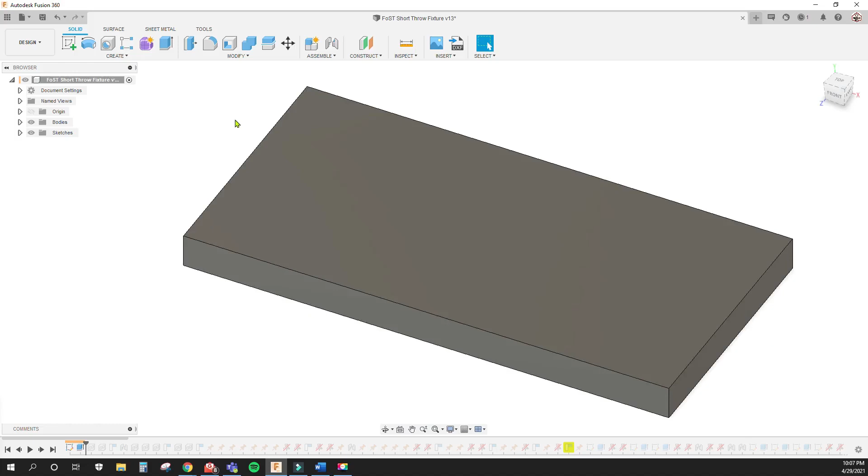To start off with, I created this plate. I bought this plate of raw aluminum, and it happened to just fit on the Tormach mill, which is what I had at the time, and it measured 14 by 7.

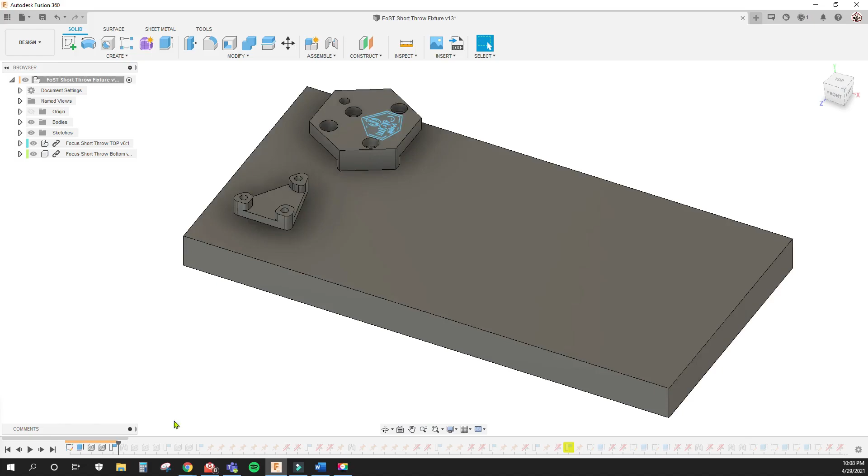After I designed that, I pulled in the upper and lower parts for the shift kit, plus a few bolts that go with it. These were already designed, so I moved them around, then copied them and moved those around until they all fit.

The plan was to do the top side of two sets, then flip them over and do the bottom side, milling out these little channels or pockets, if you want to call them that. So that's what I planned to do.

I brought in everything, got them situated, moved them around, and ended up grounding them. When you go right here, you can right click the component and hit ground - right now it says unground since it's already grounded. I moved them around until I got them to fit exactly where I wanted on the plate.

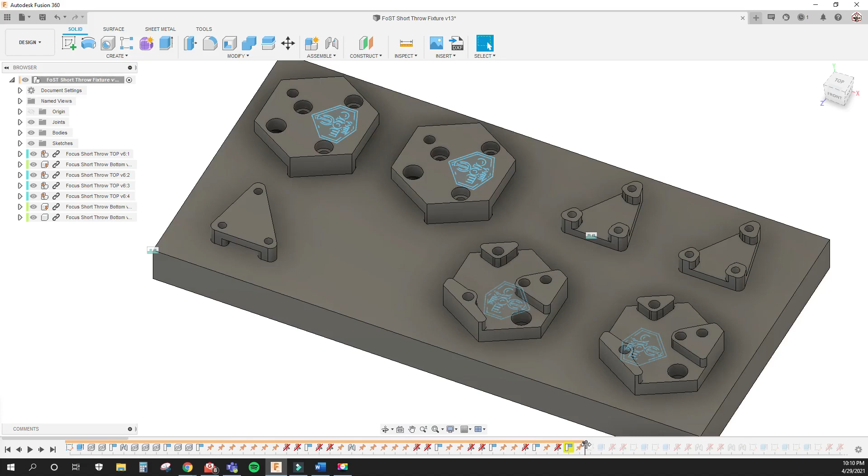After I got everything moved around exactly where I wanted it, there should be another one of these components right about here too, but I think that came later. Since I pulled this up from the archive, I don't really know what I was doing back in the day. After I got all these situated and grounded...

I created these pockets where the stock would fit into. On the left side here, I made these pockets where the raw stock will fit into, and you can see the component fits inside of these little rectangles that I made.

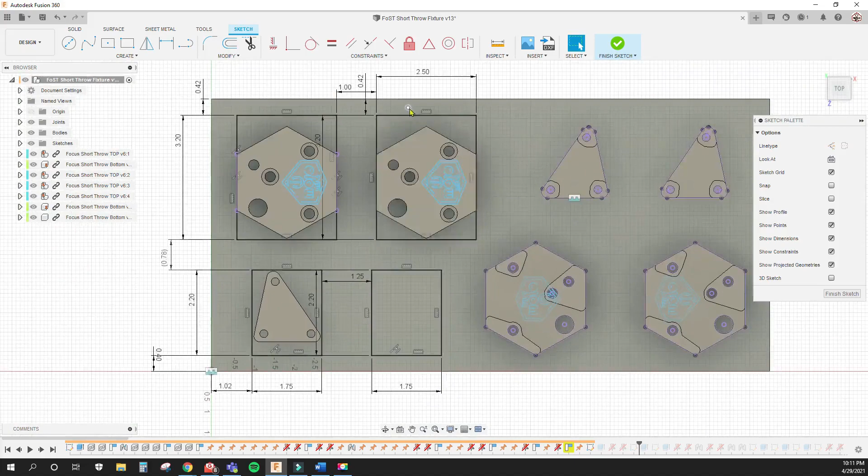On this side over here, I projected the outside silhouette of these components straight down to the plate. That allows me to use those features, the drawing entities from that projection, to make the pocket for when I flip these upside down to mill out this channel pocket.

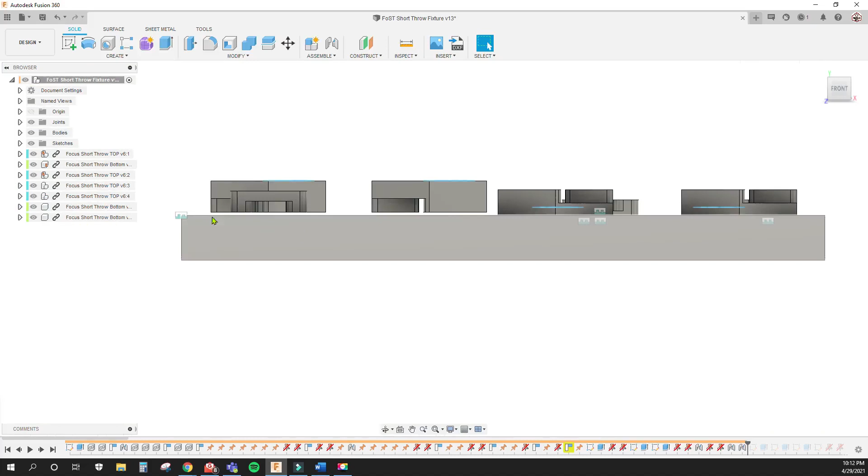One thing to note on the left side here, these are actually floating above the surface of this plate, and that's for a good reason - I want to machine this entire depth of the part on the first operation. So when I flip it over, all I have to do is machine the top at whatever's left down here, whatever I was holding onto with these pit bull clamps.

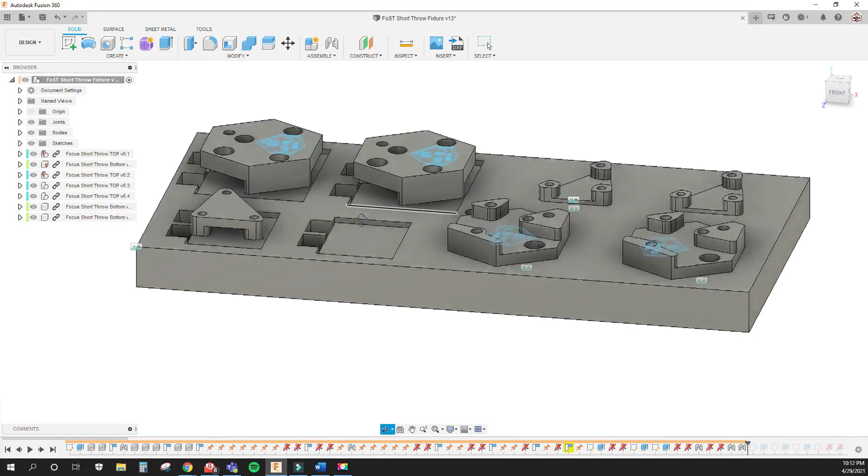Which leads me to my next thing, the pit bull clamps. I held the raw stock in with pit bull clamps from Mitee-Bite, these little clamps here, and they tell you exactly how to machine the pockets for your pit bull clamps. I believe I used this 26020 right here.

They give you this A dimension right here, so 0.2 inches away from the front side, and that's where you drill the center line of the hole. They give you the pocket dimensions - everything you need to know to design your fixture to be used with their clamps. It's very convenient that they have this. I really don't know any other way it would work if they didn't have this - I'd just be confused.

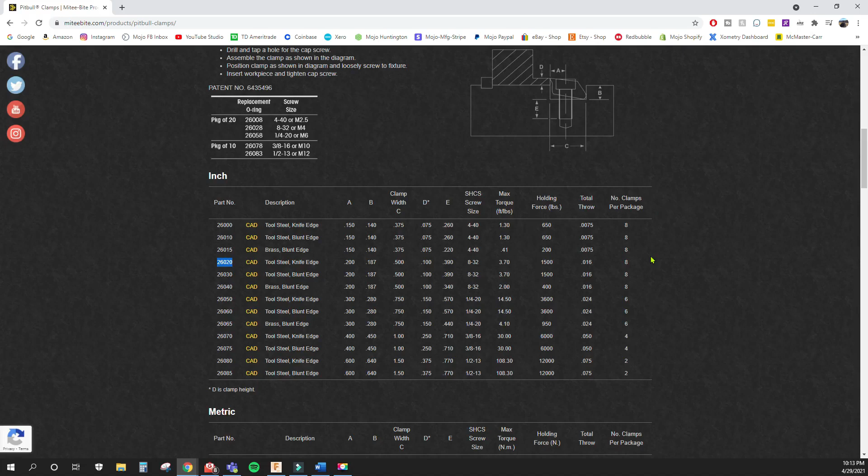So I designed these little pockets here for those pit bull clamps, and that would hold onto my stock for these parts. One thing to note, this depth was made to a specific depth to work with the depth for the pit bull clamps, so keep in mind whenever you're designing to get the depth of your pocket correct.

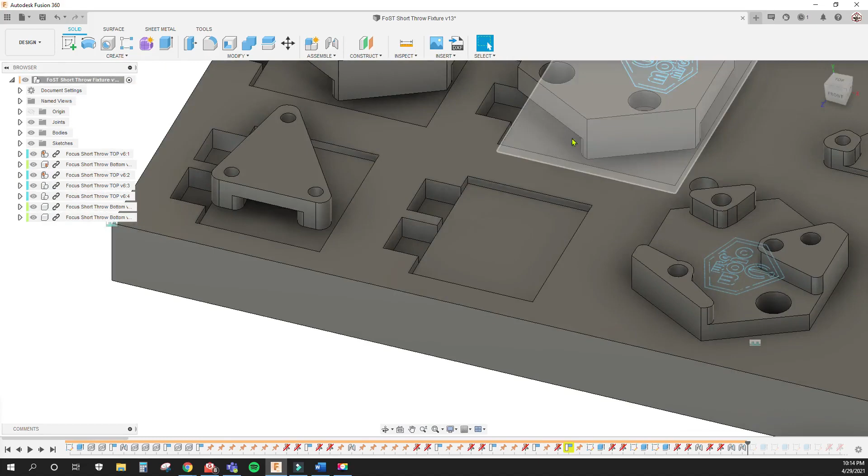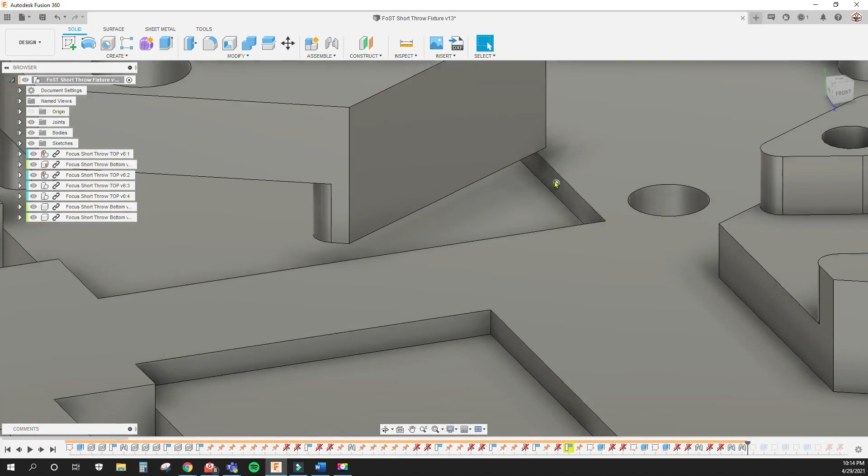Really, in some cases you don't even need to make these pockets here. I mean, you'd need the pit bull pockets, but you could just have another bar, say right here, to push the pit bull clamps against. Really I should have something like Talon grips to hold this side in rather than just the pocket of the aluminum, because this will get worn out if it's just aluminum. So you could have a steel piece there or whatever.

I did it this way because I didn't want to have to buy the extra clamps on this side. I'd rather just use the pit bull clamps and push against this side of the plate that I machined out of this pocket. So there, I go ahead and do pit bulls on this side too.

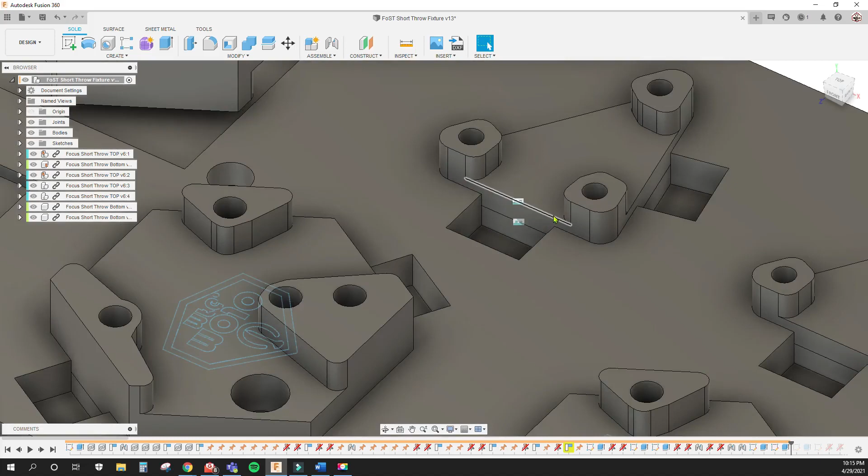This actually is the cosmetic side - this is the actual part. But it didn't really matter to me because this whole part is inside the engine. So I just wanted to be able to hold this thing down so I could machine it. The pit bull clamps make little indentations in the side of the part, which is okay for me.

These things still sold, so it didn't really matter to me at the time. Plus, I really didn't know any other way to do it at the time. Now I understand what I could have done, but still, these worked out really well.

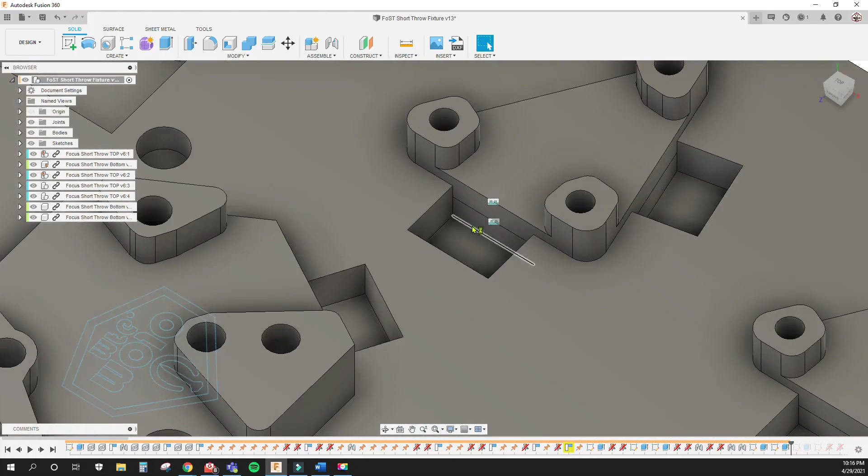So I made these pockets for the pit bull clamps on this side, and I did it for this bigger half too. I would just put those upside down in this pocket and tighten the pit bull clamps down, and I could machine it just fine. So now I added the holes for the screw for the bolt of the pit bull clamp, moving things around just a little bit more.

Now I'm adding in the stock. It was easier for me to model the stock piece that I was going to be cutting instead of just creating the stock from the setup in the manufacture tab. So I just modeled all the stock pieces.

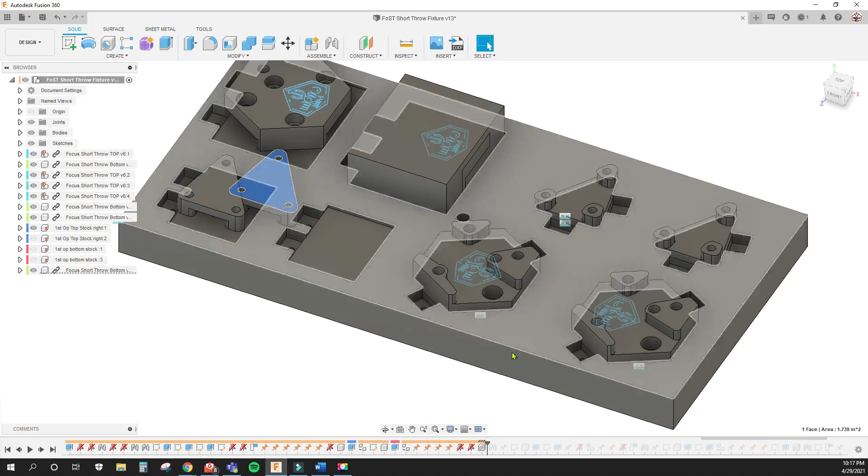Also, here's that one, I just haven't had it situated yet. There it goes. So I've added in all these stock pieces. I just modeled them up and made them their own separate component, and this is the actual stock that I will be machining these parts from.

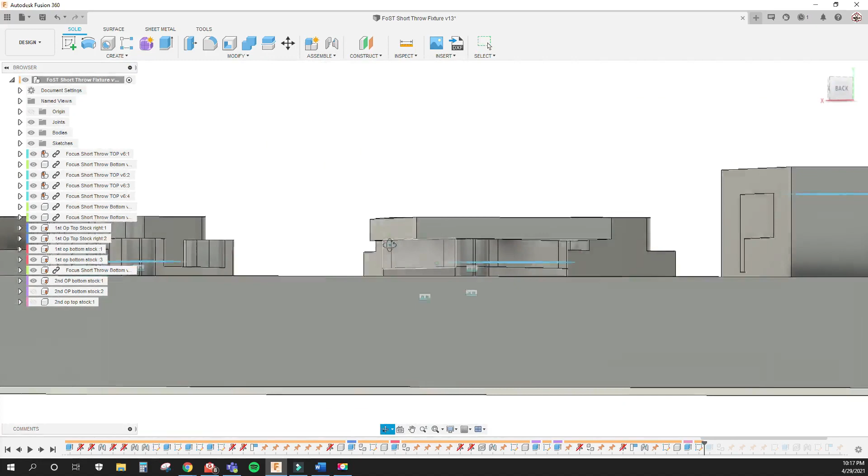Then I do the same thing here. So this is like what's left of the stock, what's going to be left when I machine it away. I select this piece of stock in my setup in order to machine this bottom half of this part, if that makes any sense at all.

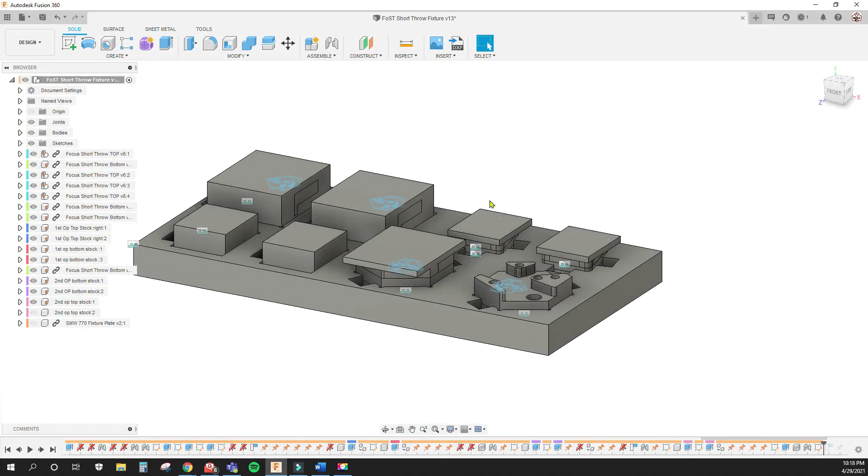Slightly confusing. So I added that one, and then there's this piece too, and that's what's left of that side after I machine this first operation. So like I said, these two sets over here are first operation, and these two sets right here are the second operation. And it looks like I added two more over here.

There was a good reason for that — I couldn't tighten down this bolt for this pit bull clamp because it was under this piece of the stock. So I had to add these two on the side here so I could tighten down this part so I could hold it to be machined. And there's that side too. So that's what I come up with.

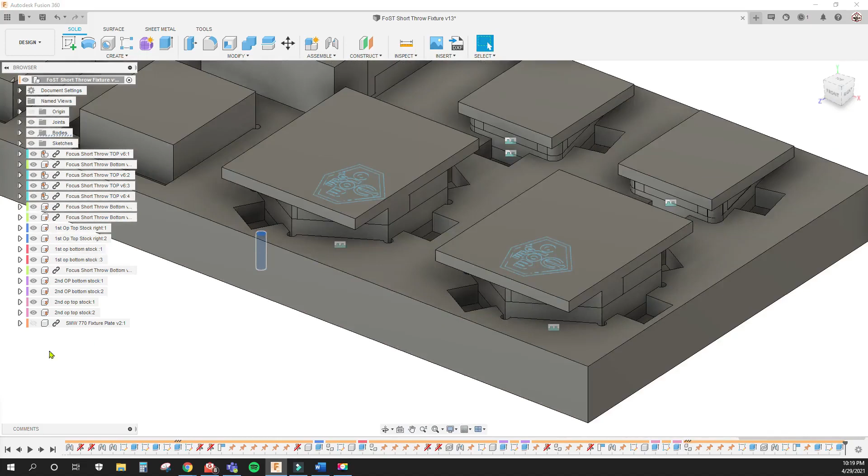That's sort of how I did it. Really the hardest part is getting all the parts in here and getting them situated where you want them so that they're away from everything else, so you can make sure they can be machined easily without running into each other. So here's the machining setup for doing one full plate.

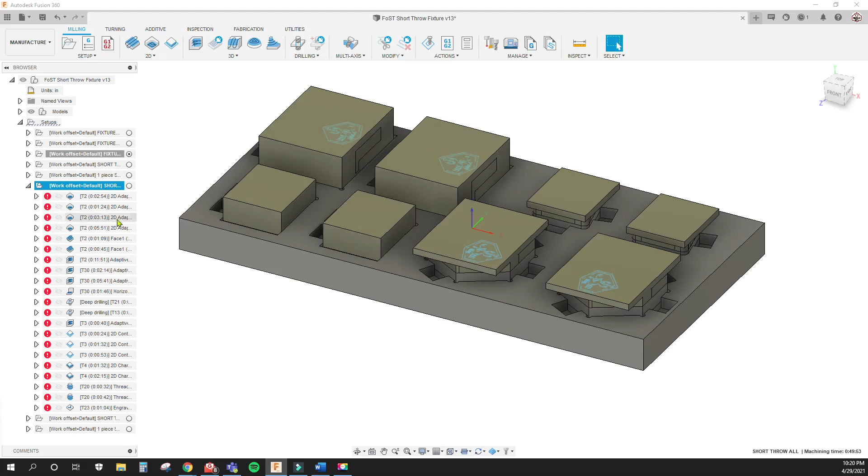You can see how these turn like a light tan brown color, and that just shows that that is the stock part, the stock to be removed. These are the 8 pieces to be machined, and my origin point is the bottom side of this.

So I modeled this in and then I machined it when I machined the fixture. I added this feature in here so I could find the center of this hole and the bottom side of that hole. That's the work coordinate system for this whole plate.

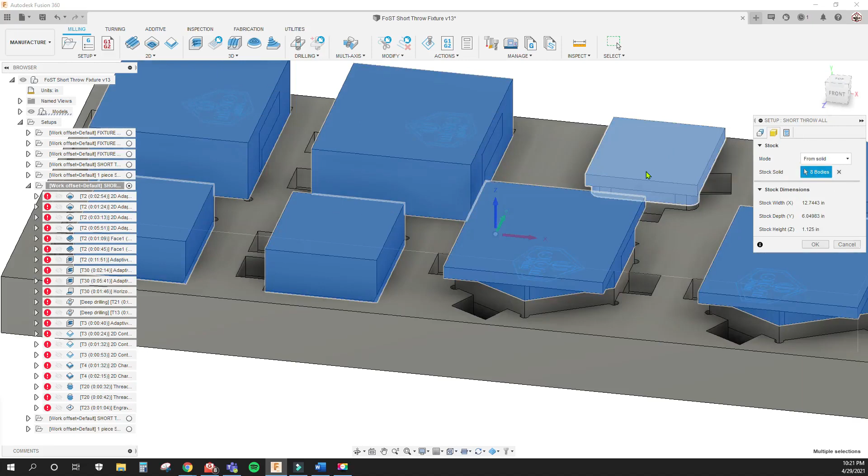And then I chose the stock sizes. I did it from solid, and I chose all these solid pieces for those specific parts to be machined. Then I can go in here and turn off all these stock pieces, and then I can go in and start adding different tool paths.

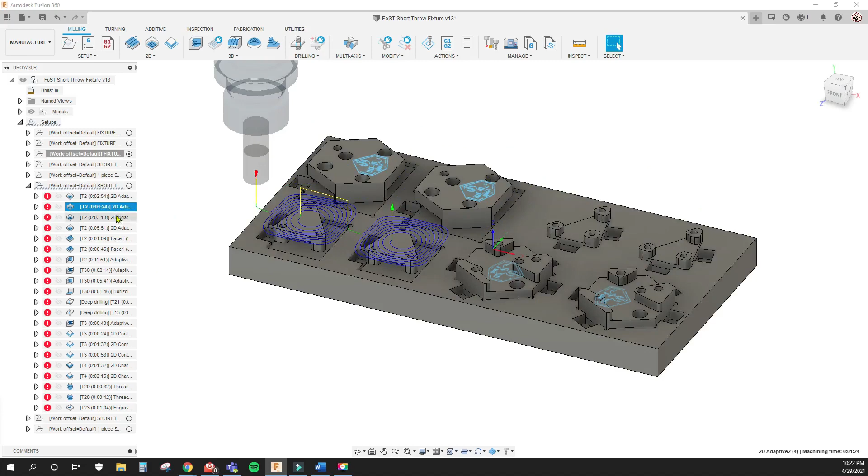So here we go here. Selected the top parts of those parts and hit OK. I'm not going to hit OK because it'll take forever to load. Same with those — just doing all the adaptive tool paths, and I believe this is the shear hog here, which is the 3/4 inch end mill. And then I start roughing everything out on the sides.

So really, once you get everything situated and get your stock pieces set up, this is a breeze. This is just as normal. If you're familiar with programming parts, this is just as normal. You just start clicking whatever you need to be machined for that specific part.

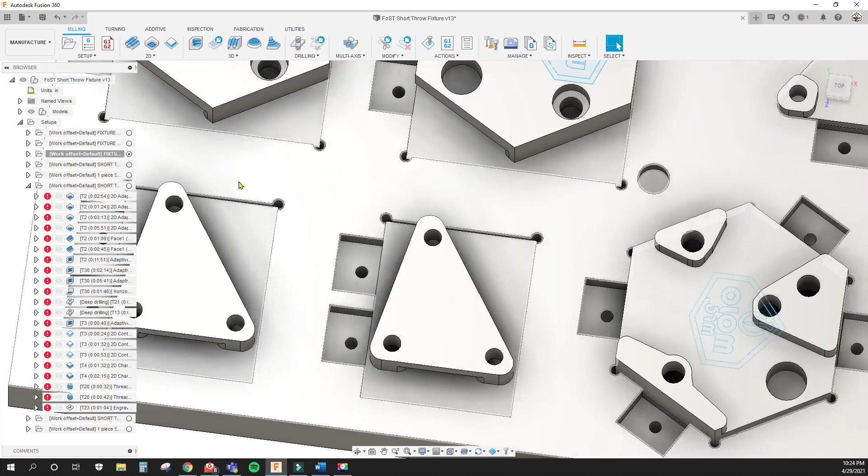So I really think that that is it for these pieces here. I always made sure that the stock was pushed up against these sides here, and that's how I knew how to locate the stock every single time. So I really think that's it.

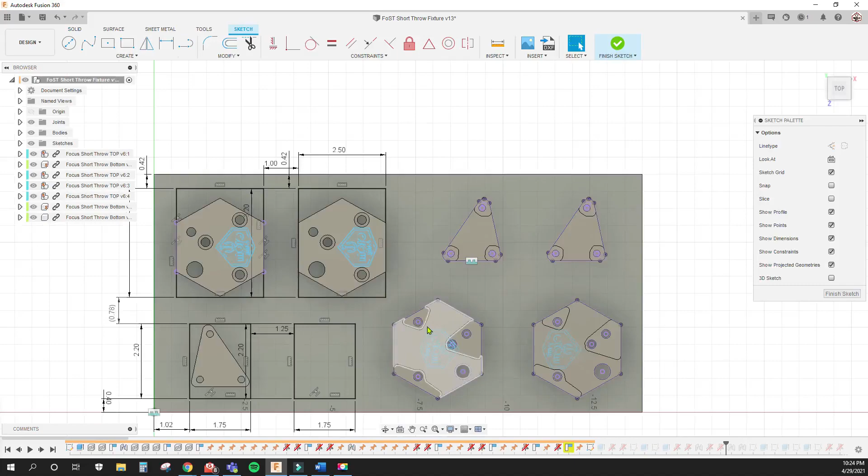Without going into too much detail — this video could be forever long if I went into extreme detail, so we're not going to do that. Just know that in the design tab, using the project feature is key.

Once I got these situated, you can hit P for project, and it'll bring up this dialog box, and you can select the outside silhouette of this part. You can select these things that you want to project from this specific part onto this body here, and then from there you can make the pocket for this to fit in.

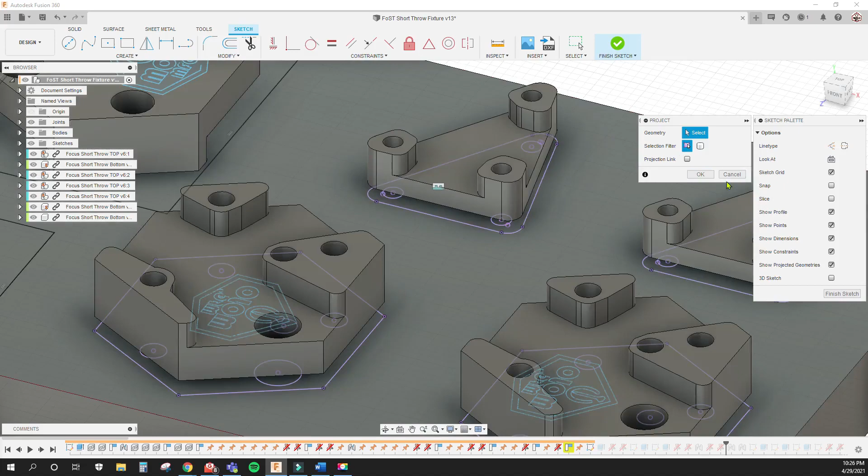So that is definitely the key when making any type of fixture, soft jaw, whatever — at least for me it is.